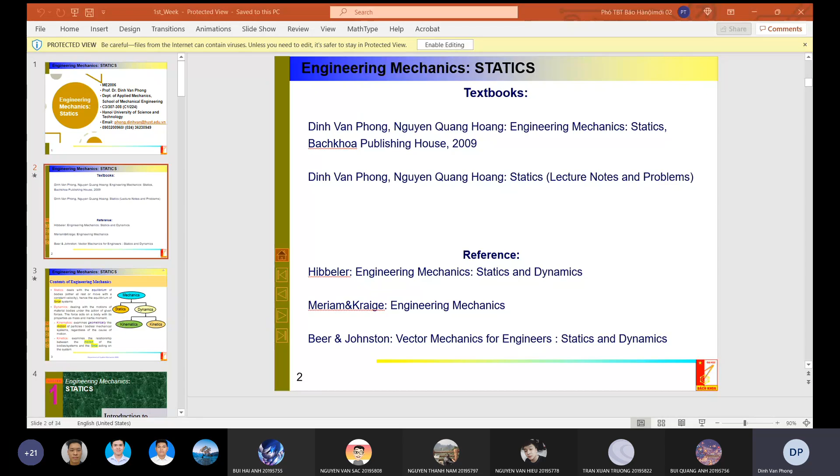So you see me again, I check it. Okay, well, this is good.

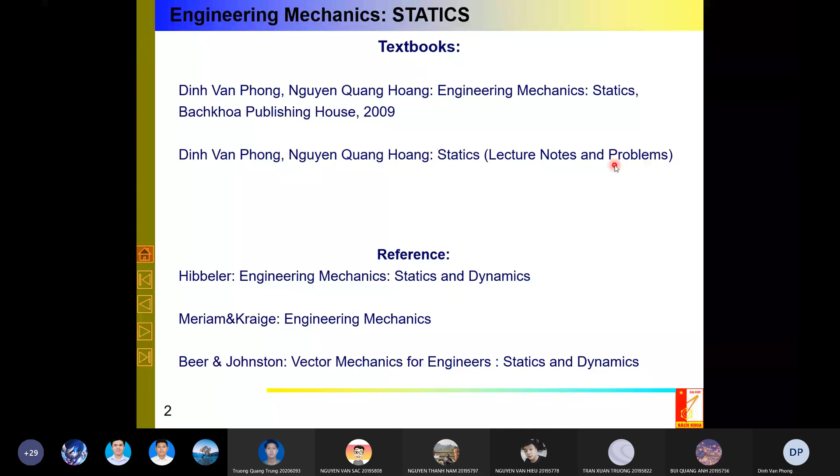Before going directly to the course, I show you this picture. In the title, you see I wrote engineering mechanics. Engineering mechanics has some parts. Normally, over the world, you split it in two parts: static and dynamics.

I will explain it later, but for your information, in mechanics we have two courses, two parts: static and dynamics. This first course, in this first semester, you are dealing with static. In the second semester, you are dealing with dynamics. Dynamics is split into two parts: kinematic and kinetic. Kinematic means you are dealing only with motion, and kinetic means we are dealing with force and motion also.

So over the world, mechanics is split into two parts: static and dynamics, first semester and second semester. However, for the Vietnamese course, because I discuss so much with Vietnamese students, in the normal course we combine the first one, static and kinematics, in one course. So in the first semester, they have static and kinematics, and only in the second semester they have kinetic. And for other students not from mechanical engineering, they have only one course of mechanics.

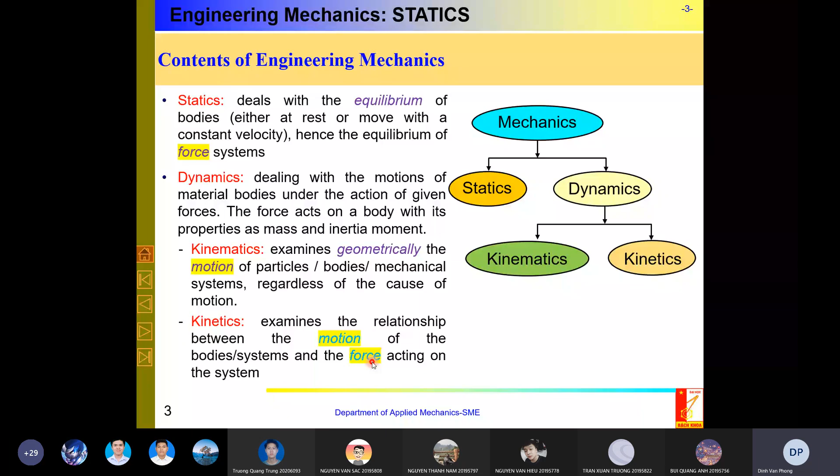And now we go to the first part, the static one. In this first chapter, you will learn the most important things in static, as well as for mechanics overall.

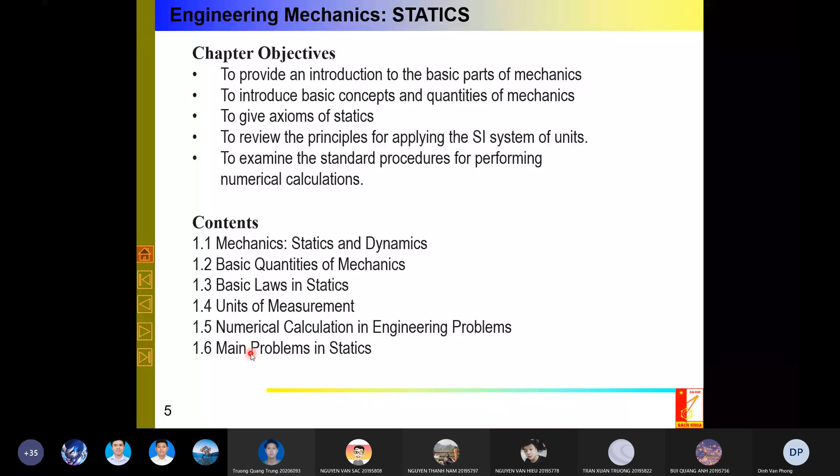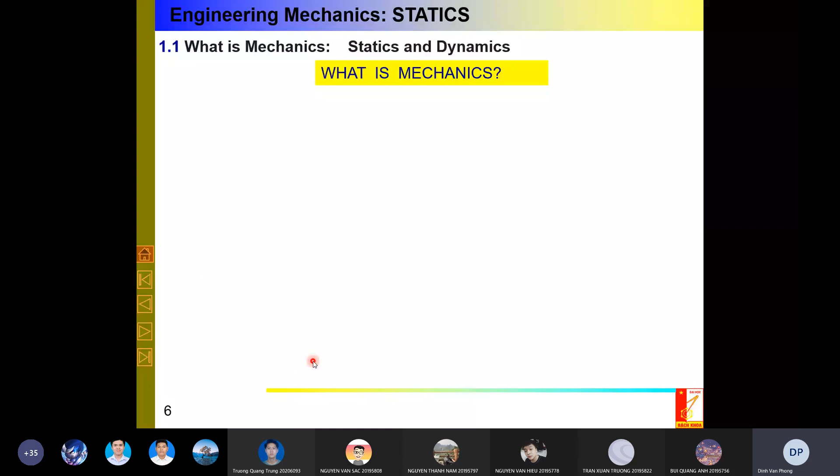So again, now you have more time, let me explain what mechanics is, step by step. What is mechanics? Mechanics is the field of science which studies the relationship between bodies and forces. The reason for any motion of the body is forces, so it means I try to find the relationship between motion and forces.

The body, or in normal language you call it things - anything or some things are under the action of forces. And under the acting of forces, the thing or the body starts to move. So it means we study the relationship between motion and forces.

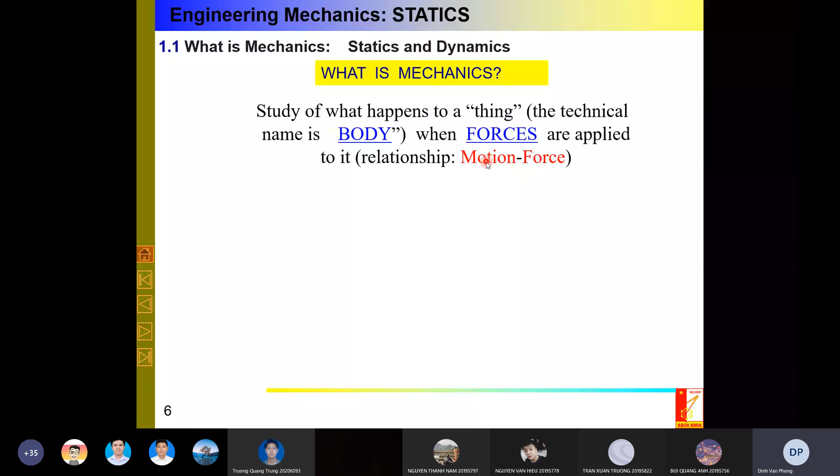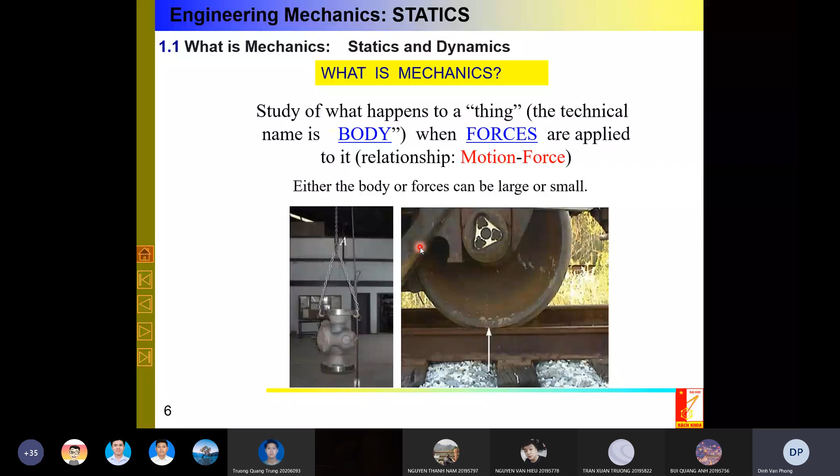So, as a definition, we can say that mechanics is a branch of physical science concerned with the state of motion or of rest. The rest or equilibrium is only one state of the motion of the body, or of the thing, under the action of, or subject to the action of, force.

So you see again, I have the physical science which studies the state of the body, and this body can be in motion or in rest, in equilibrium, under the action of forces. Okay, so you see again, I showed this picture, or some slide, some minutes before.

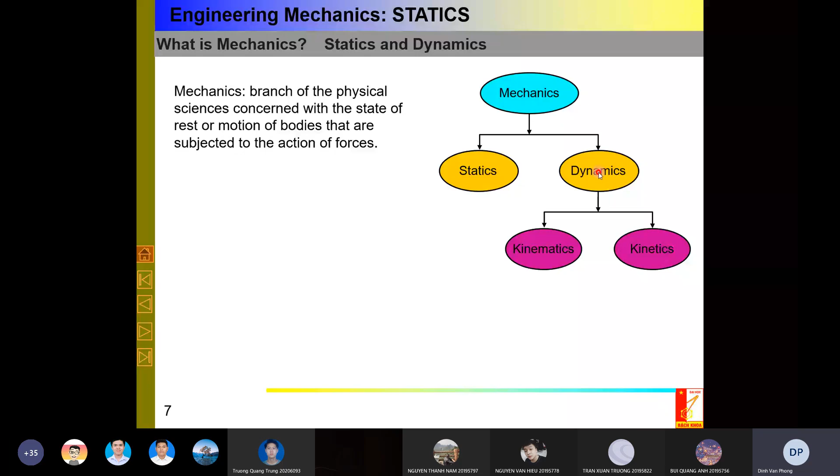You see that mechanics again here is the branch, the field of science which studies the relationship between action and motion. And because I say that the state of the body can be in motion or in rest, the first part we are dealing with is statics. It means the state of the body which is in equilibrium under the action of forces. And the second part is dynamics, where we will study the motion under the action of forces.

You see here again, statics deals with equilibrium, no motion. Or, you see, I say no motion, but in some textbooks we can see that, or move with constant velocity - it is a bit further, an extension of this, with what we can call the inertial system. With the inertial system, moving with constant velocity, we can say it is in the inertial system. But for easy understanding, we can say that the body is in equilibrium.

Okay, or no motion. The dynamic concept is the body with motion. In this case, I mean motion with acceleration, accelerated motion. So you see that if I have no acceleration, it means the body will move with constant velocity. Okay, so for us to understand well: statics deals with equilibrium, no motion, and dynamics with motion - meaning motion with acceleration.

And the dynamics will again be split into parts: kinematics, which studies only the motion but doesn't try to explain why this motion occurs - it means without consideration of the force, only in the kinematic portion, the very general case. So then I have the relationship between force and motion.

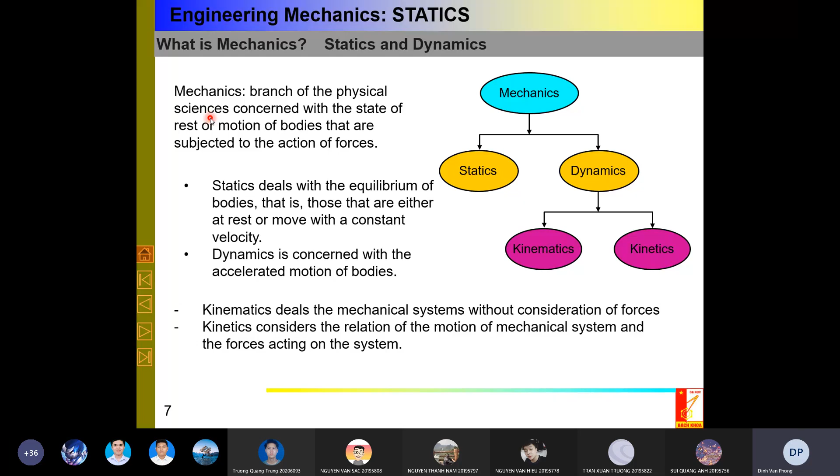So again, this picture, I hope it is more clear for you, and which topic belongs to the first course: first semester statics, and the second semester dynamics. And really, mechanics is the very basic physical science for other sciences - for example, for design of machining, for robots, for robotics, for anything. Really, it is a very basic physical science.

Okay, and now we go to the second portion, because for each scientific field, you should specify some quantities for defining it. You see here again, you can define space, length, time, mass, and force.

We have already spoken so much about the relationship between motion and forces. So we are speaking about motion - motion of what? Motion of one rigid body. A rigid body should have some mass. And how can we define the motion? The motion should have - we can measure the velocity or acceleration.

For defining velocity and acceleration, you should be able to measure the distance, so I should have length. This length is in some space, okay, and in time also. So, with defining the distance, the length, and time, I can define velocity, and so on for acceleration. So you see again these quantities: space, length, time, mass, and force.

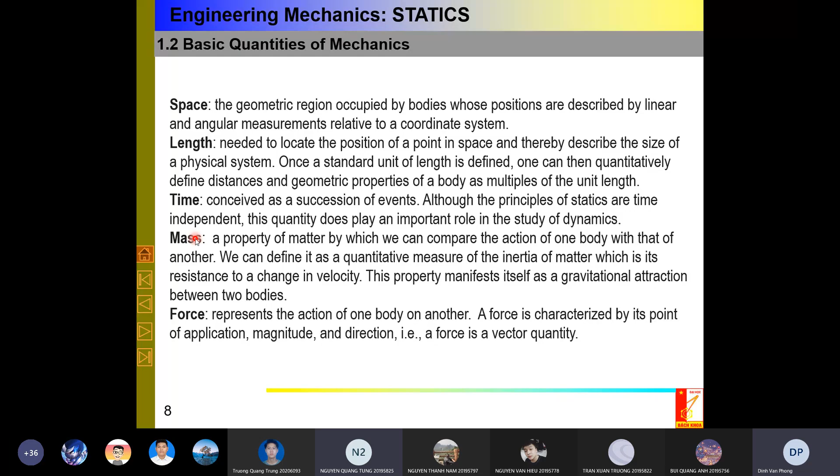So they are really related, and this is important, remember it well. Here you see I have identified length and anything that specifies space. Remember well, I have four quantities: length, time, mass, and force.

So I have one first question for you, because it is early morning, so my subjects are very sleepy. I say that these four quantities are very important for measuring, they are basic quantities. Do you think we can define them in any way, meaning they are independent of each other? Length, time, mass, force. Do you understand my question?

Because I want to specify the relationship between force and motion, meaning velocity and acceleration, I should need length, time, mass, and force as basic quantities for defining it. You have already seen it, they are very basic quantities. Do you think they are independent or not? Can I define any case?

Okay, the first question. In my opinion, yes, in slow motion they are independent of each other. But are they independent?

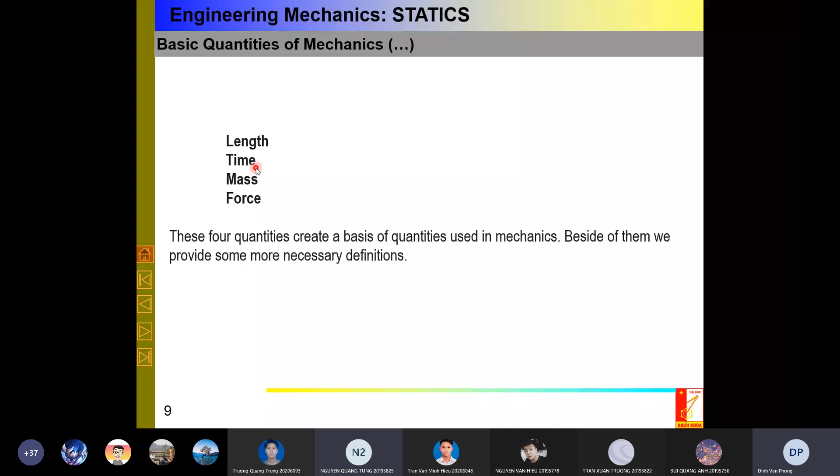You see again, I have space. I include also the length and something. Time, mass, they are absolute concepts. They are independent of each other. And I have force also. So I have four: space or length, time, mass. They are absolute because some minutes before I said time is absolute, and force.

But why are they not independent of the other three? Why? We will see it. Do you think why they are not independent at this moment? Who can give the answer? I will explain it later today. However, if you can give...

You can imagine it. I think it is due to... friction. It's Mr. Doãn Nhật Minh. Doãn Nhật Minh, okay. You think force is not independent of the other three because of friction? Of friction, yeah. No friction. Okay, good.

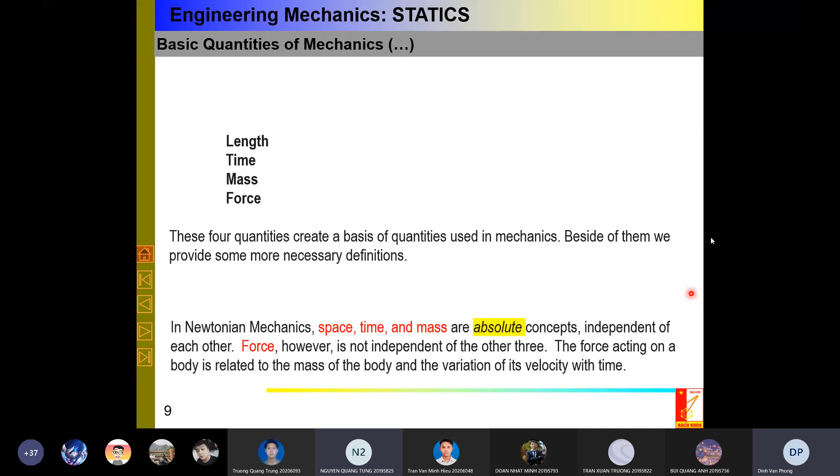Good that you try to explain it, but no, not friction. Even if later we see, maybe, but it is good that you are involved in the question. So you think friction has no relationship to our question. Okay, later you will see why you cannot define space, time, mass, and force as independent. Later, okay. So some other definition.

Idealization, you see, like for other scientific fields, the real life is another thing, but you want to try to explain why this event happened, or why this rigid body has motion, because I try to find the relationship between motion and force. I want to try to answer why the car can move, why the plane or the bird can fly. The real life is very complicated, however, I should make some assumption, some idealization.

I can take some model or some idealization. It's a very ideal assumption in mechanics. After defining the model, I can apply our theory. So you see that idealization simplifies the application of the theory. The more complicated model, the better, however, it is too complicated to solve the problem. So it depends on the level of complication or difficulty of the model, so you can solve the problem.

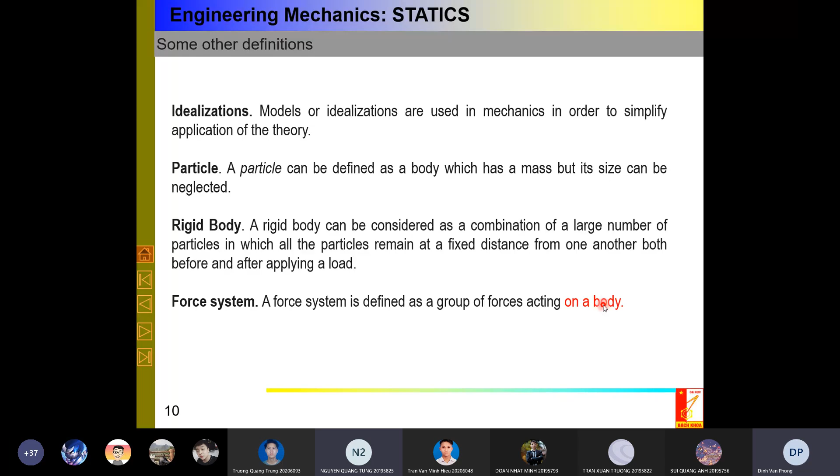Or later you see, I have the coordinate system with constant velocity, meaning it is an inertial coordinate system. However, I say that it is in equilibrium, no motion. So it is equilibrium, and this equilibrium is under the acting of a force system. Again, I have the body under the acting of a force system in equilibrium. So sometimes in textbooks they say equilibrium of a body, or sometimes they say equilibrium of a force system. Some minutes before we said a force system is a system of forces acting on one body, so equilibrium of a body or equilibrium of a force system - they are the same.

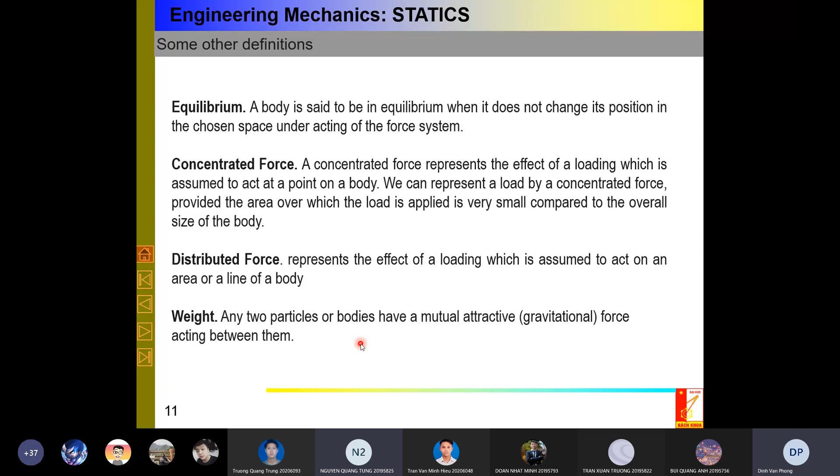Sometimes in real life there is confusion between mass and weight, but I have already explained it. Mass is a property of a rigid body, but weight is a force. With weight, because it is a force, I can define the interaction between two rigid bodies.

This is very important. Also, many errors derived by students or even engineers come from not understanding where the basic law of statics comes from.

Like other scientific fields, statics is based on some basic laws, the so-called axioms. What is an axiom, a basic law? It means a law that everybody feels is correct, but we cannot derive or prove it. You can only feel it and accept it. If you accept it as a law, then you have another scientific field. In statics, we have six axioms, or six laws.

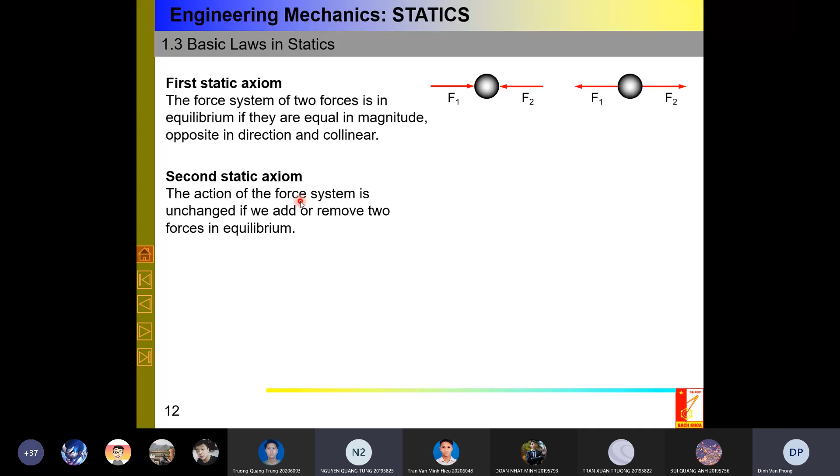Second axiom. Here I have only two forces, but what happens if I have more forces? In this case, the second axiom gives us the tool for it: the action of the force system is unchanged if I add or remove two forces in equilibrium. So if I have a car, a house, a building, a construction, a machine, or anything with many forces, the motion of this rigid body, or the action of this force system, is unchanged. Step by step, I remove two forces that are in equilibrium, and this simplifies the force system. This second axiom gives us the tool for studying more complicated cases.

For example, here I have a rigid body with five forces. F4 and F5 are in equilibrium according to the first axiom, so I can remove them. Now this rigid body has only three forces. This is just an example to see what tools we have for studying engineering mechanics. I can add these two forces, but the body still has the same effect, whether motion or equilibrium.

Third axiom, the parallelogram law: the resultant force of two intersecting forces can be represented by the diagonal of the parallelogram, which has the two element forces as its sides.

You see here, I have F1 and F2, and the effect of these forces should be the same if I replace F1, F2 by one force, so-called the resultant, FR. R stands for resultant.

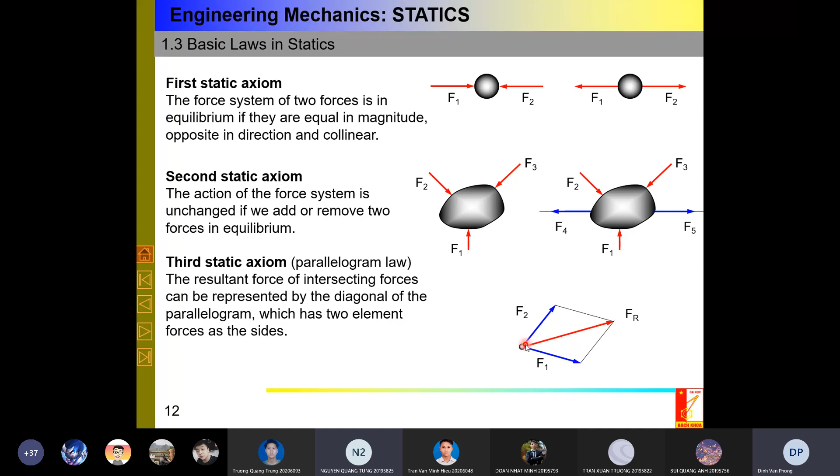Again, the parallelogram is something like this: F1, F2, I can replace them by the force which is the diagonal of the parallelogram. This is called the parallelogram law.

The fourth axiom, you know it. It is so-called action and reaction. I have two rigid bodies, and they have an action on each other. In this case, the interaction of this action and reaction should be the same, collinear. Sometimes we call it: action is reaction.

However, you see that these two, the function of A on B and B on A, should be collinear, equal in magnitude and opposite in direction. One question for you again.

This force in magenta, in green color, and the red color - do they create an equilibrium system or not? Do you understand my question? Again, do these two forces create an equilibrium force system or not? In my opinion, it is not.

Mr. Nhân, what do you think? They are not. Why? Because the forces don't act on the same body. Good.

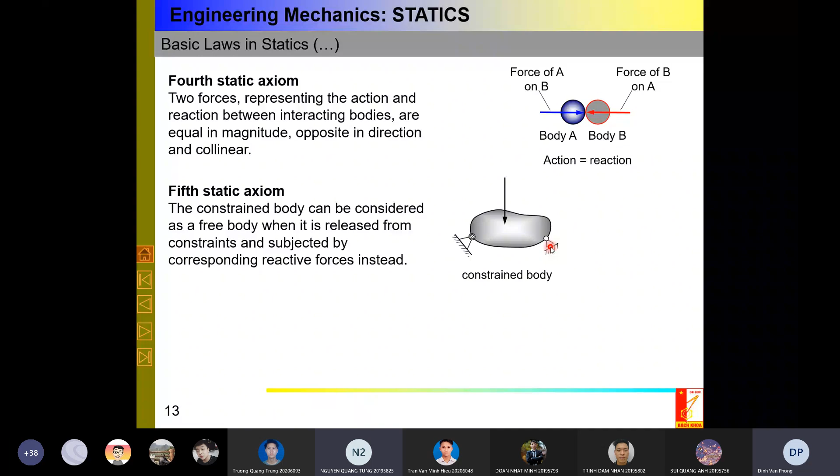But I can remove it from the environment, from the other body, and make it free. Instead of the constraint from the environment, I will draw the reaction forces. So you see here, I have one constraint body with a concentrated force, and it has interaction, or is kept, with the ground by this support. But now I can make this constraint body into a free rigid body.

Okay, so instead of this rigid body with environment, I have this rigid body, one force, two force, three force, and four forces, and really I have a force system, and I can start to study this force system. This axiom, or this basic law, gives us the tool for calculating statics, and all static courses will deal with something like this.

Very important for you, very important to remember. You see here, I have one support, the second support. But this support has only one reaction force, and here I have two reaction forces. How can I do it? Why? Later you will see it, but it's very important for you to remember.

Okay, next time we do it. But it is very important for an engineer to see why. Maybe today you studied why this support has only one reaction force like here, and here for this support I have two components. You can start to understand it. It's quite interesting. Now we go to the sixth axiom.

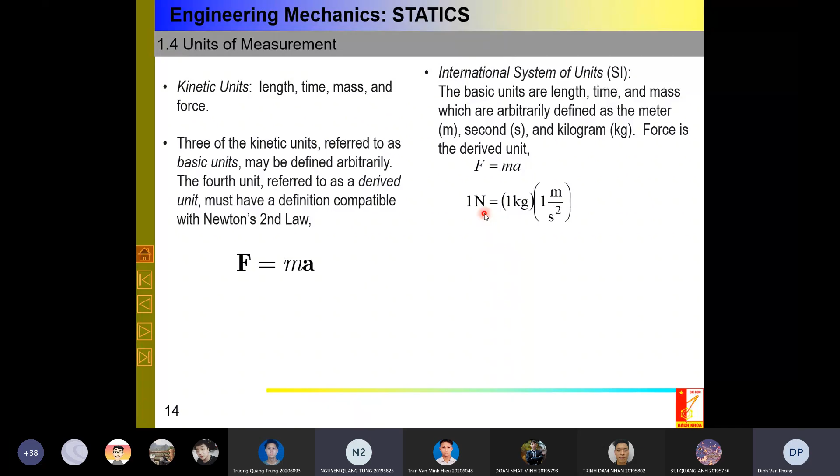So surely in this case, according to the law F equals ma, the unit for force should be 1 Newton. A Newton is the force which, if acting on a mass of 1 kilogram, will give the particle an acceleration of 1 meter per second square. So you see, really I cannot define the unit of force independently, it should follow this law.

In the second system used in the world, it is the so-called US customary units, or sometimes I call it FPS. FPS, why? F stands for foot, it is the unit of length. P stands for pound, it is the unit for force. And S stands for second, it is the unit for time.

So you see, in US customary units, or FPS, mass is a derived unit. Mass M equals F divided by A, really it is from Newton's second law again. In this case, I take slug. A slug is the mass of a particle which, under the action of a force of 1 pound, will have an acceleration of 1 foot per second square.

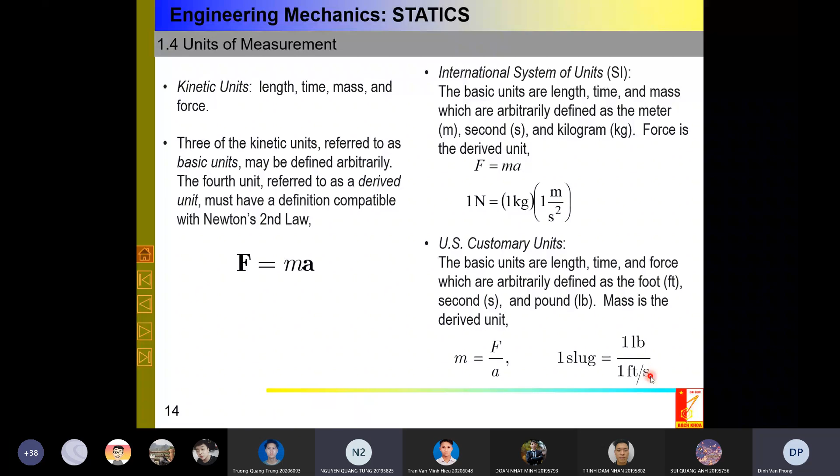Another thing you can read at home, it's quite easy: dimensional homogeneity. It is a way for the student to check the correct answer in a problem. In an equation, the dimension of the result should be the same on both sides, left side and right side.

And these are two important things: significant figures and rounding off numbers. It is very important for you, since it connects with calculation. I don't know what happened with you some months ago.

You see, due to the pandemic COVID-19, last semester all our university should have waited, but the situation was too bad that we had to make examinations in offline and online ways. One of the big problems is rounding off numbers and significant figures, because in quizzes the machine calculator marks the result, and it is very important whether you have a good result or not. The machine cannot recognize the correct result from the bad result if you don't have enough significant figures, and reading the calculation you get a big rounding off error.

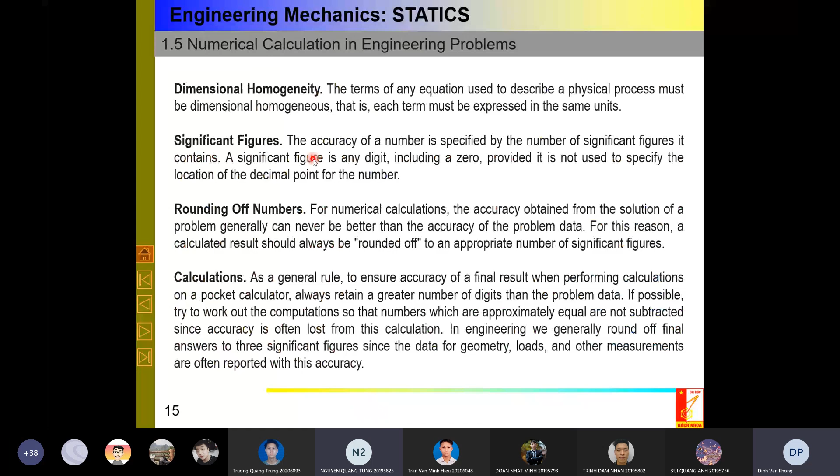Come back again to this picture. Here is one typical problem. You see that I have one rigid body under the action of a so-called given force. I have two supports, this one first, and the second one. The task of the engineer is to try to find the reaction forces at these supports.

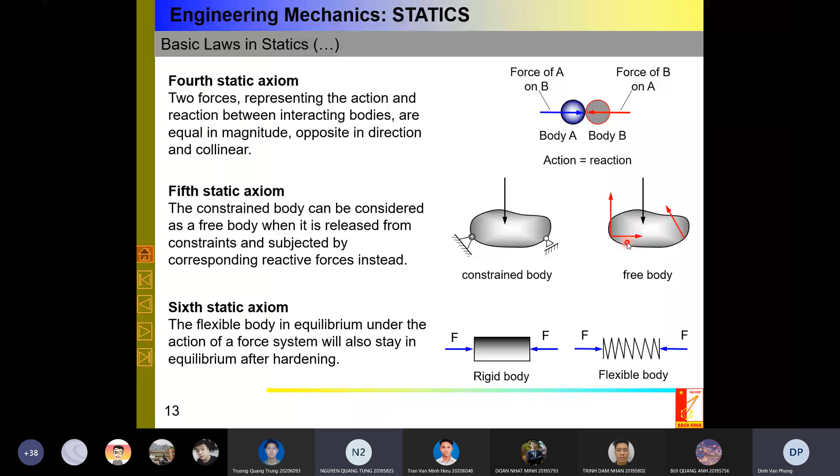So you see that the theory you will do together with me is finding the condition for equilibrium. Sometimes in the examination, normally the question for you in the statics course is to specify the reaction forces in equilibrium.

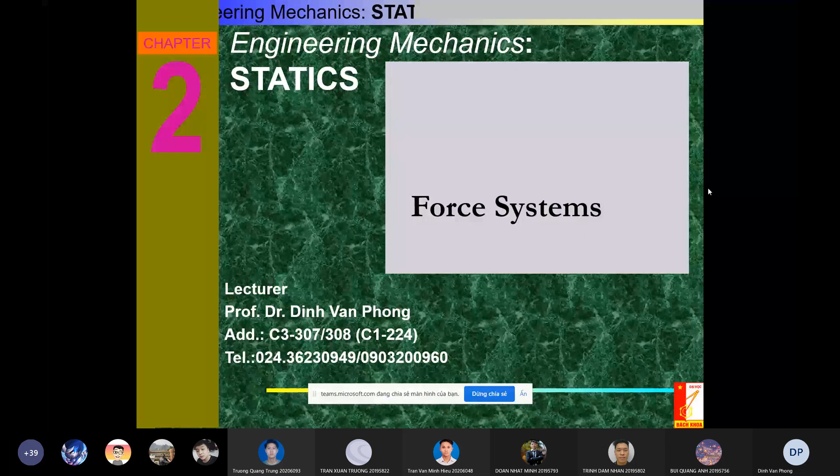So in this case you define many things. For example, you define the vector of the forces, and with the vector of forces, since force can be defined as a vector, with the vector definition you can use many mathematical tools. With this you can explain the force system in 2 or 3... it is better to...

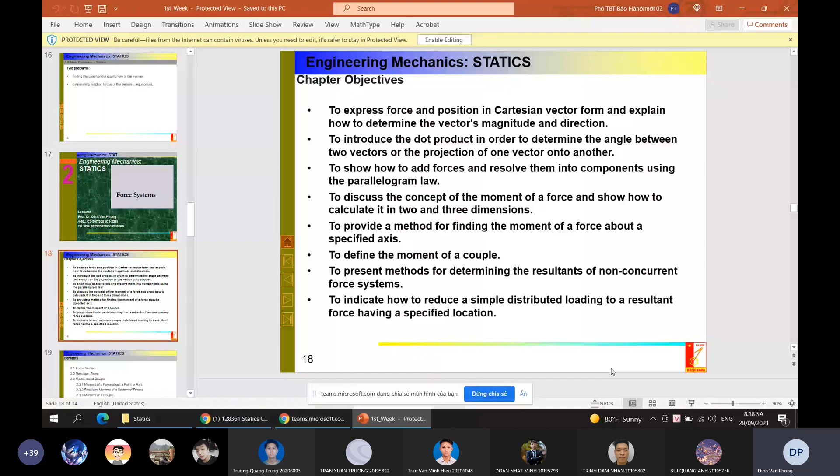Okay, it's better. So you see that you can specify it in 2 or 3 dimensions. And beside of force, one important thing in this chapter is that you will also define the moment of a force. One very important thing of the force system is beside of forces, you should be able to define the moment of a force about a point or about a specific axis.

It is important not only for this course, but later in your engineering future. This moment is very important, not only about a point, but about a specific axis also. And also, after that, preparing for specifying the case where the rigid body is in motion or at rest, you should be specifying the resultant.

Of non-concurrent forces. Today you will be able to specify resultant force, but for concurrent forces. And later, for very complicated and very general cases, even non-concurrent forces, you should specify the resultant. So some important things for you, you can see here.

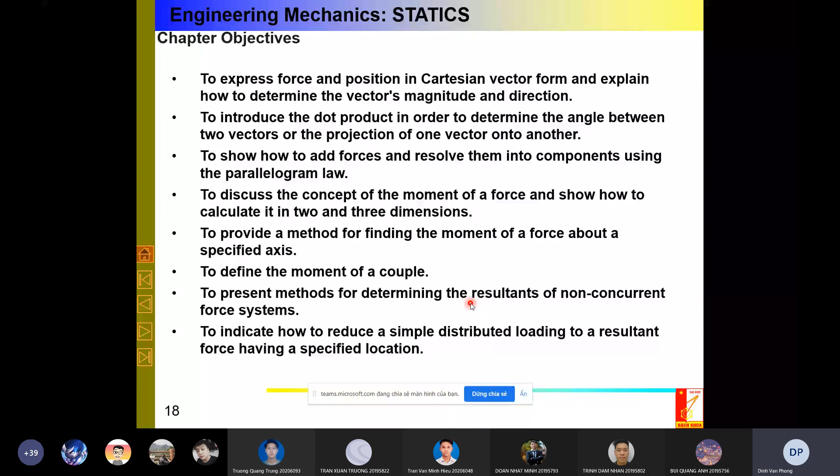You should specify force vector, the force like a vector. You should specify resultant force, but today you will specify only resultant force of concurrent forces, which means forces that intersect. And by the end of the chapter you'll be able to specify the moment of a force about a point or an axis, and specify the resultant. With the resultant force and resultant couple, you will be able to reduce a force system from a very complicated force system.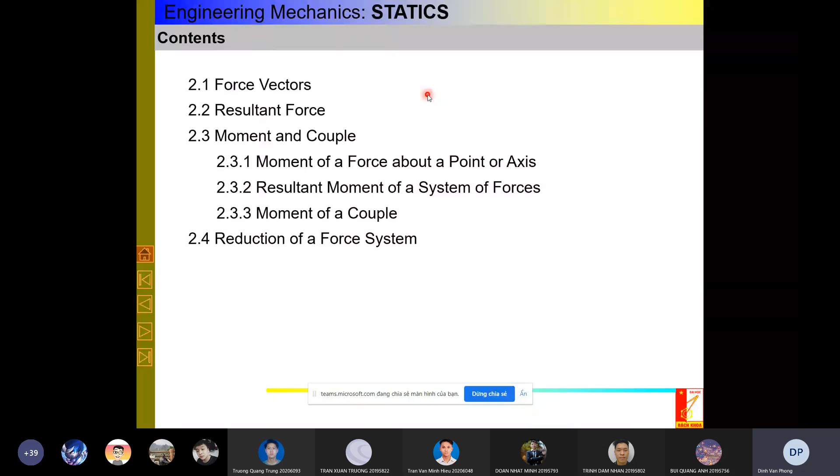Normally, not only in mechanics but in any scientific field, you have two kinds of quantity. Like mass, volume, length, force, acceleration, velocity - you have two kinds of quantities. The first one is scalar, the second one is vector. A scalar is a quantity characterized by only one number, and this number can be positive or negative.

If I have mass, volume, space, distance, length, time, for example, it is a scalar. But the vector, instead of just magnitude, has direction. So a vector is very important, for example, position vector.

I specify it because I have a coordinate system, so each point can be specified by distance from the origin of the coordinate system to the point, but I can connect it by one vector. Force vector, couple or moment, is a vector also. Velocity also. The vector quantity should be specified by magnitude, but also point of application and direction.

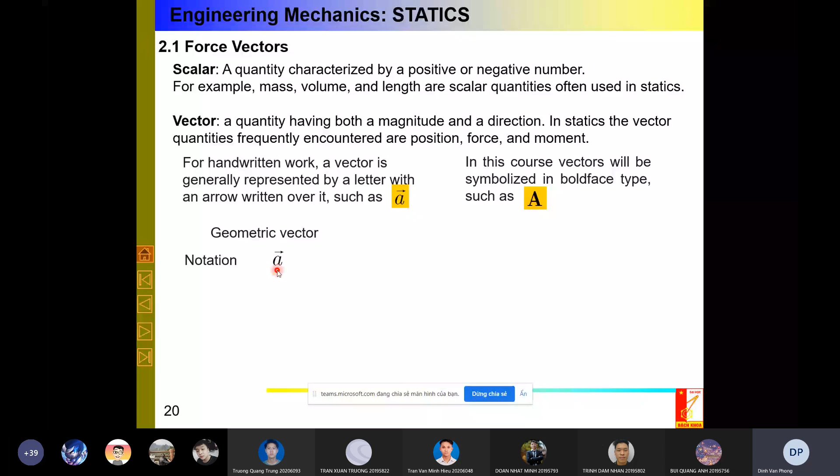So normally, we call it geometrical presentation, and here is so-called algebraic presentation or matrix presentation of vector. Geometrical vector, I write A with the arrowhead, and algebraic vector - sometimes we call it, in connection with computers, algebraic or matrix vector - right here A. In this case, A has three components: AX, AY, AZ.

Normally, I like A as a column vector, but it's better for use in textbooks to write it in one row. So I transform it from the column - AX, and below it AY, and below it AZ - but that requires a lot of space, so it's better to write in one row. In this case, I write AX, AY, and AZ, three components in one row, but with the transpose. T stands for transpose operation.

So again, you see geometrical presentation versus algebraic or matrix representation. If I have a basis in the coordinate system in geometry, I have three unit vectors I, J, and K. Surely, if I have algebraic or matrix form of representation, I can write I, J, and K both ways. But here I have the geometrical vector, and a general or arbitrary vector can be written by combination of these three unit vectors, aX I, aY J, aZ K.

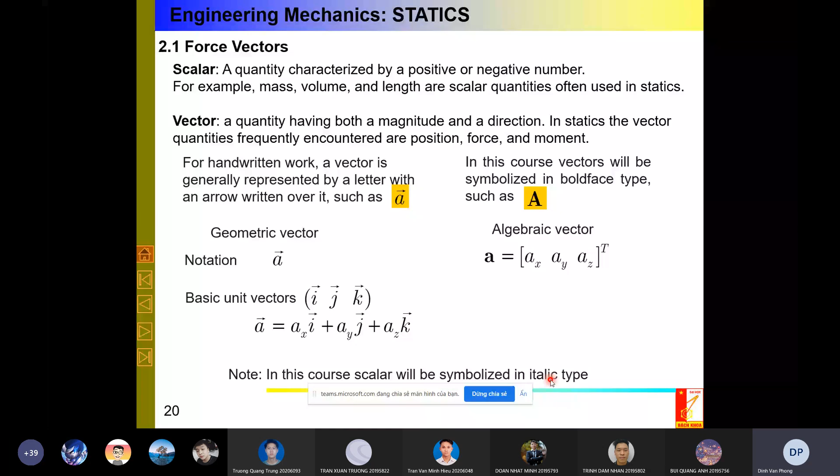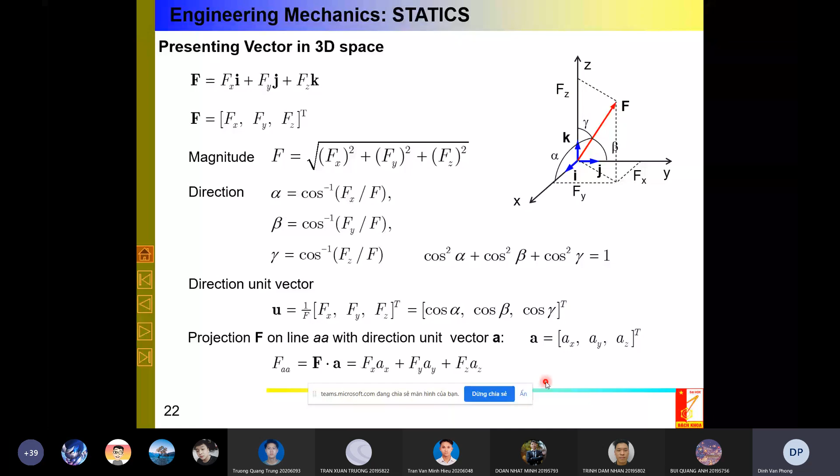One important thing for students: the right-handed coordinate system and right-handed rule. Many students forget it, but especially in 3D mechanics, it is very important to use this law. If I use my right hand, I see three components: x, y, z, or 1, 2, 3, repeated in cyclic order.

How do we apply it? If my fingers show curling from the positive direction of the first axis to the positive direction of the second axis, the thumb will show the positive direction of the third axis - Z, or axis 3.

I repeat: if my fingers show curling from the positive direction of the first axis to the positive direction of the second axis, the thumb shows the positive direction of the third axis. In X, Y, Z terms: curling from the positive X-axis to the positive Y-axis, the thumb shows the positive Z-axis direction. This is the same as saying 1, 2, 3.

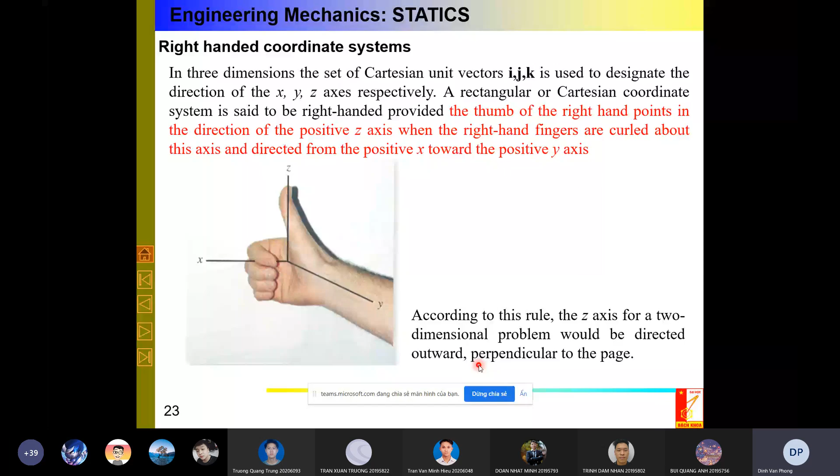Now today we will have the first example. Next time we'll have more examples and some quizzes, very fast. But today, because we have some problems with keywords, let's look at this first together.

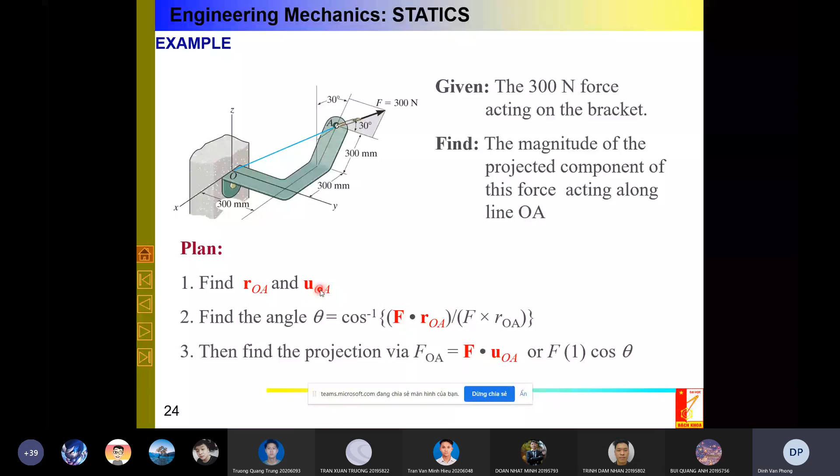Or you can find directly the projection by using dot product of F with UOA. Or you can find the angle theta also. You can mix step 2 or step 3. It's important that you find unit vector UOA and take a dot product of F with unit vector UOA.

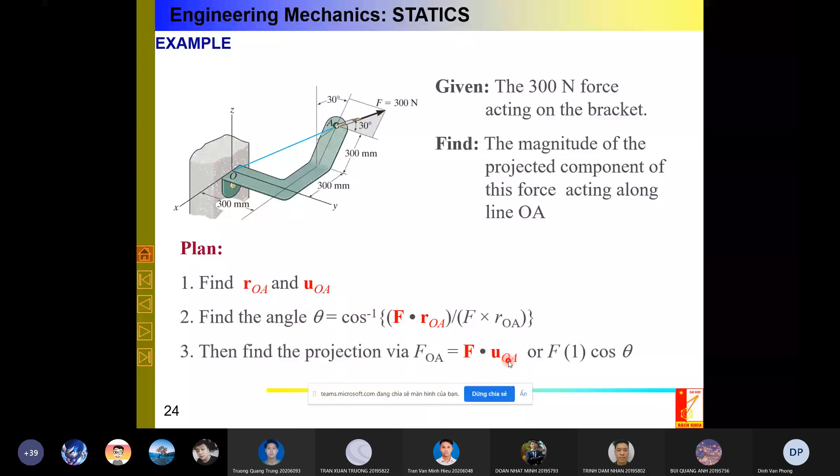Okay, so we can go on. It's quite easy because from the geometry, from the given parameters, you can write very easily the distance here in the direction I, J, and K. Okay, unit vector.

And from this, I can calculate the vector ROA. With these three things, maybe it is a bit more complicated for you with the geometry, but it is not a problem of mechanics, it is a problem of geometry. So if you cannot follow it, read very carefully at home later.

So the important first thing is we calculate the position vector, and I calculate the magnitude. With the magnitude, you can calculate the unit vector. It's important. And now if you can write F directly, you can provide a dot product.

However, it is better to first project F in this direction of this plate. So you see, with this direction, I can have these three components of F. And with this, you can provide a dot product with unit vector OA and vector F, and get the result.

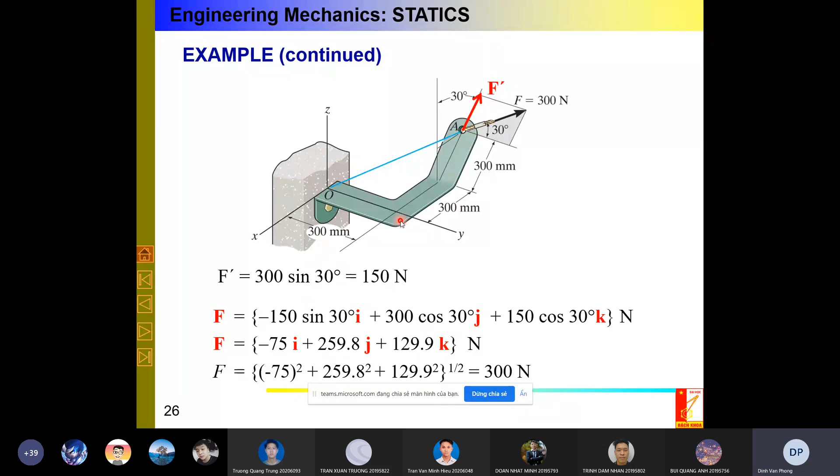Important that after finding the unit vector, I can provide a dot product for finding the projection of force F into that direction.

You see again, if I have F, I have cosine—there are many ways to get the result. So for the first example, we can go further.

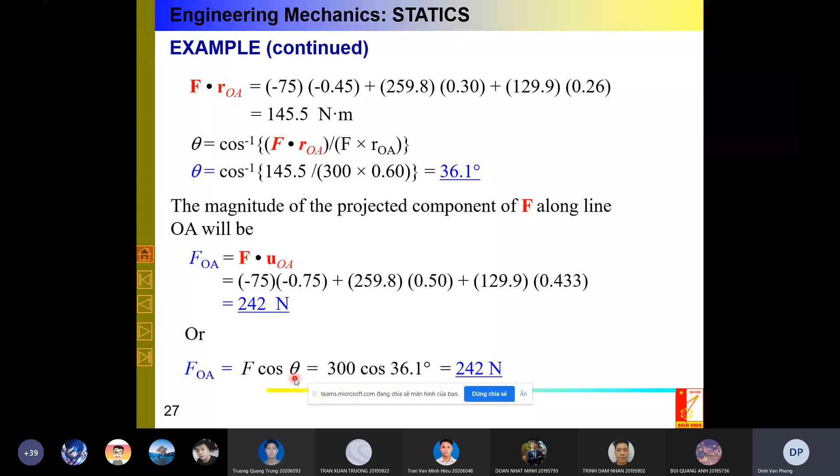And now, as we already said at the beginning of this chapter, for studying force systems two things are very important: resultant force and resultant couple. Today we start with the resultant force. But at this moment, you will study only the resultant force of concurrent forces, meaning forces which intersect, or have one common point.

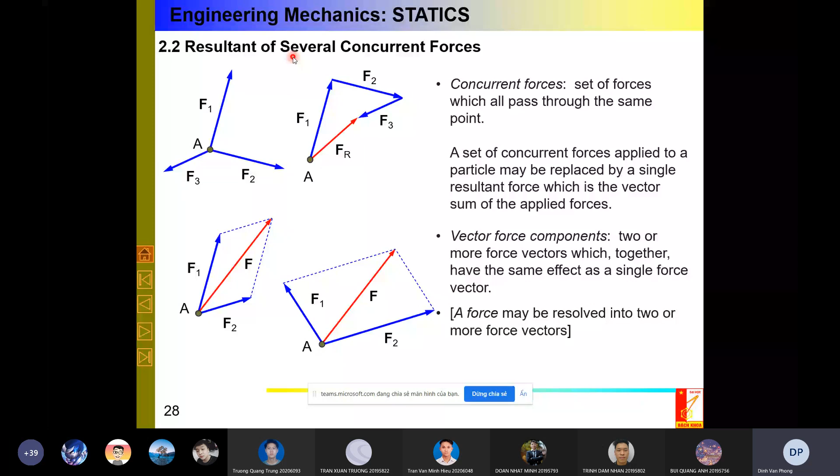So let's come back to the topic of this portion: resultant force of several concurrent forces. How can we find the resultant of several concurrent forces? If I have a force system which includes F1, F2, F3, and many forces - so I have a force system with many forces F1, F2, up to Fn, and each force Fk, running from 1, 2, 3 to n, has three components.

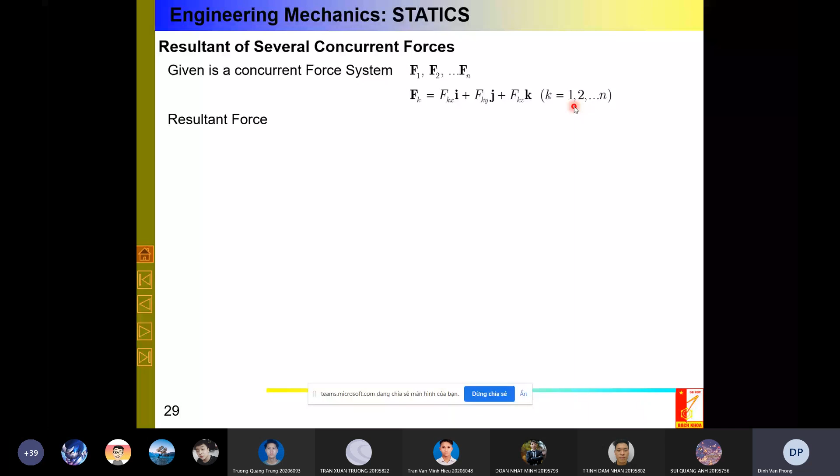I project it into the Cartesian coordinate system, giving Fkx, Fky, Fkz. So I have the force system with n forces, and the resultant force can be replaced by only one resultant force by adding algebraically. If I have the vector, Fr can be calculated from F1, F2, F3, up to Fn.

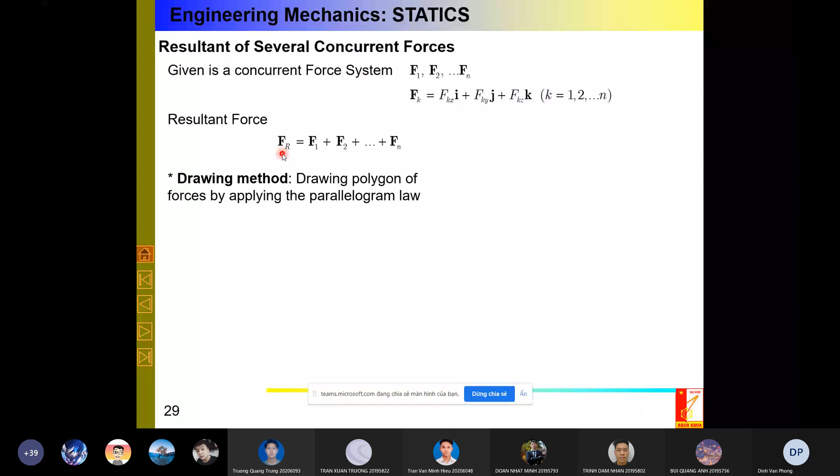So I have two ways to do it. The first one is the drawing method - drawing a polygon of forces by applying the parallelogram, step by step like here. This is the so-called parallelogram method, and we already mentioned the proof of this a few minutes before. This is the so-called drawing method, but it is hard work for us.

It is better to use projection, so that the force can be represented by components in three directions. The force can be projected onto the X axis, Y axis, and Z axis, so I can write it using unit vectors I, J, and K. So these three, FRX, FRY, FRZ, are the summation of all components in X, Y, and Z.

Because these are three components, we can calculate the magnitude again by using the Pythagorean theorem. And also with the magnitude, I can calculate the unit direction vector, the direction of the unit vector, by alpha, beta, and gamma.

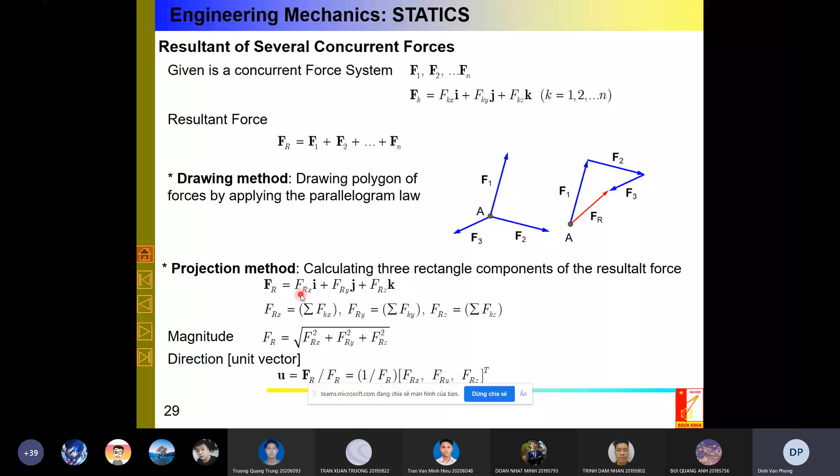Now I gave you one algorithm. It is quite easy, but maybe it is useful for you to calculate it. If I have two vectors, I draw a parallelogram, providing a sketch with the two vectors, and label it exactly with the letters I know. After that, using trigonometry, I can calculate the diagonal of this parallelogram very easily.

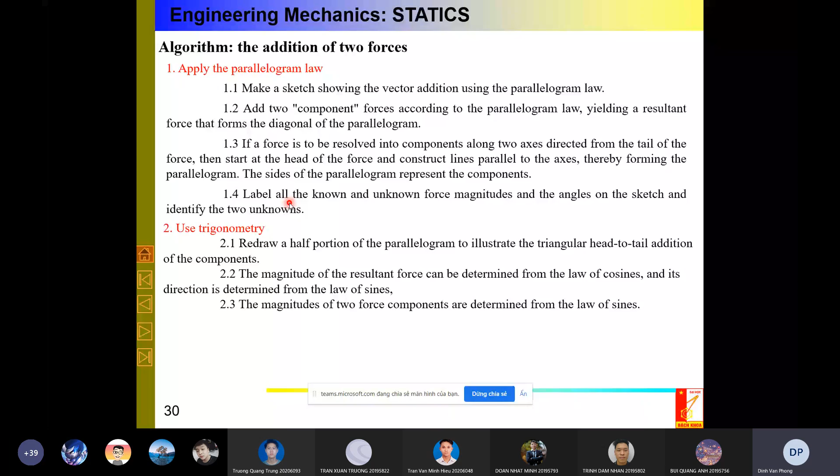The trigonometry I use, especially two laws: sine law and cosine law. Sine law with the sine, and cosine law with the cosine, for calculating the magnitude of the diagonal. These two trigonometry laws are useful for calculating the addition of two vectors, either by parallelogram or by algebraic addition.

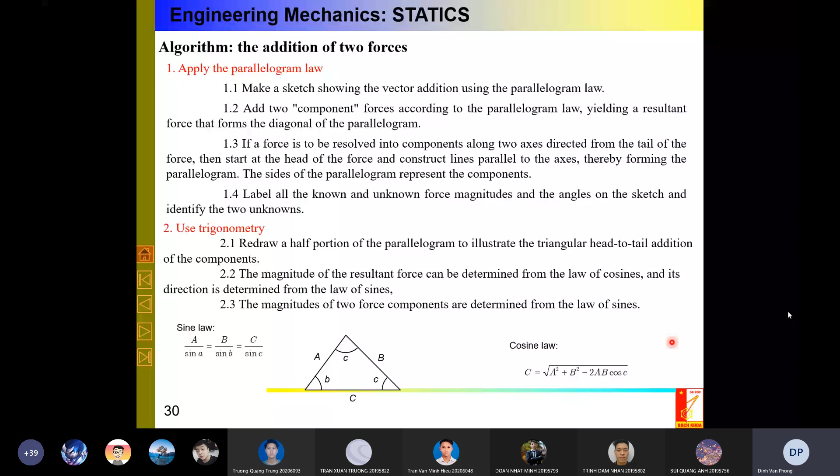Last example today. Very easy, but maybe it will be the first quiz or first examination. I hope that the COVID situation will be better. I have three concurrent forces, so try to find the magnitude and angle of the resultant force.

Here we have only a two-dimension problem. I have X and Y. It's quite easy, I'll give you 2 or 3 minutes, and we do it together. Make the orientation.

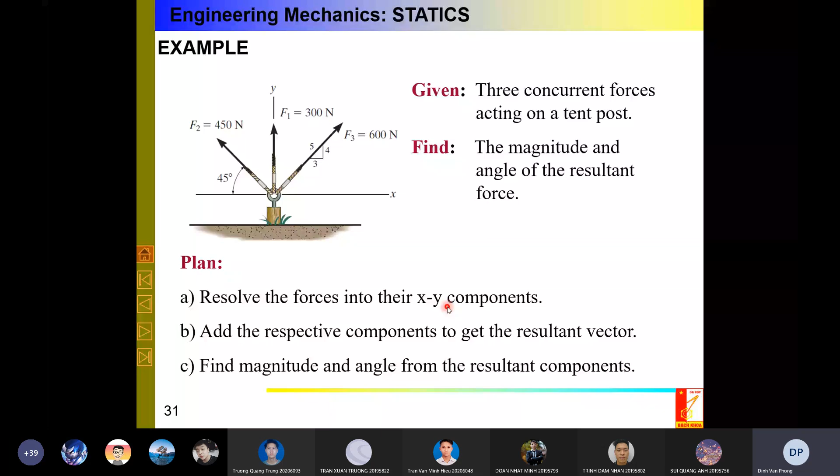F1, okay, it is in the y direction, so quite easy. Fy, then f2 and f3. Repeat it, quite easy, so you see then.

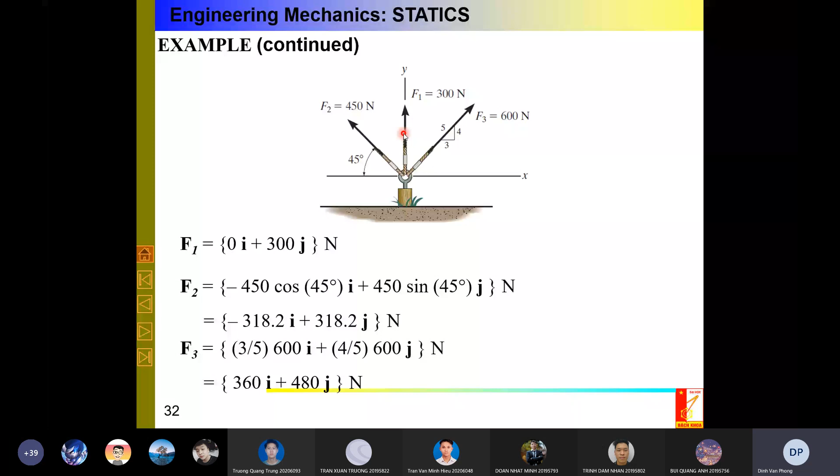After this example, this step, I can provide a summation of each component. So after providing this, I can get very easily the magnitude and direction. So Mr. Hyo, it is very fast, very quick, but fast and furious.

Pay attention. In this case, if I have quizzes online, the machine will make a mark for you, so it is not so bad. It requires only the number. Mr. Tung and Mr. Bing is better.